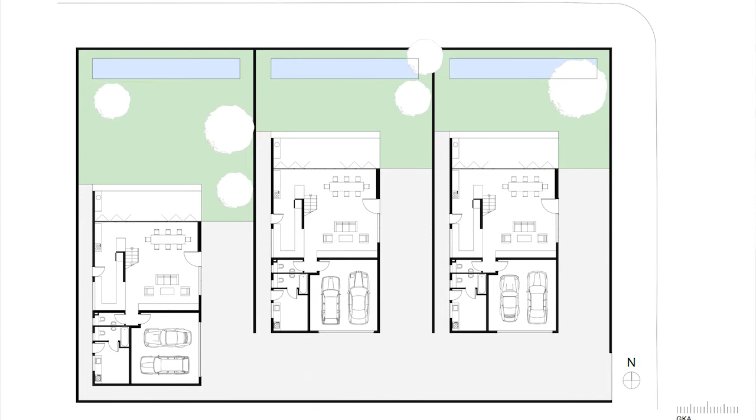As you can see, they're made almost entirely out of concrete, and we had a very experienced specialist concrete contractor on the job. Together we optimized the scale and the size and the design and the construction sequence of these 3 identical boxes so that we could get the maximum reuse of the formwork. This efficiency of scale meant that we could afford to buy brand new shutters for the job instead of hiring them, and that was the biggest factor in achieving this very smooth, close to perfect concrete finish.

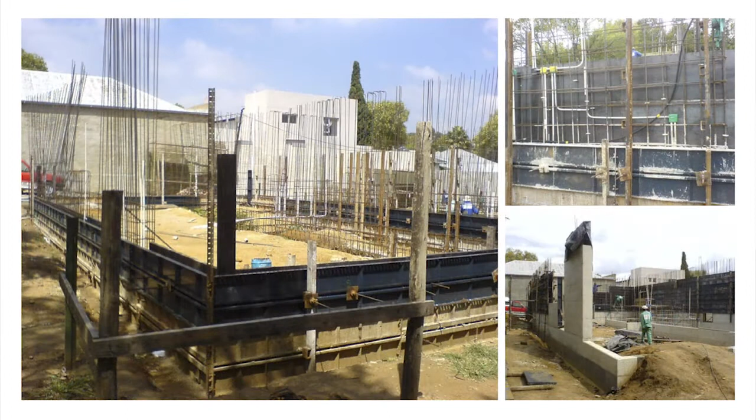There was no chasing of services into the walls. All the services, all the conduits, all the draw boxes had to be precisely pre-planned and shown on elevational drawings so that they could be positioned in the walls before the pour. So we had to be quite thorough.

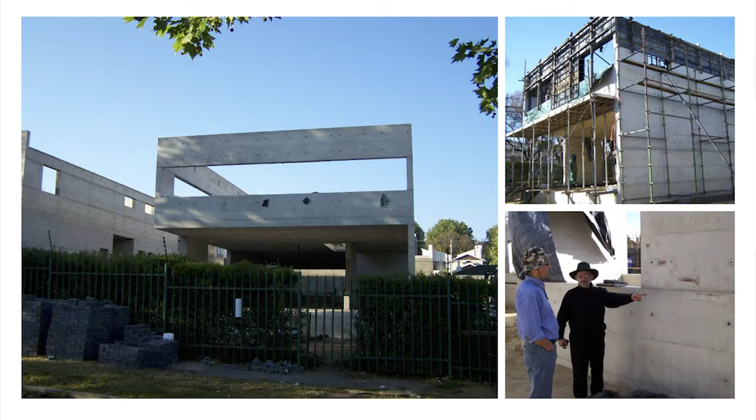I lived in this house for 10 years, and I loved that house. We had all 3 of our children there. But it's also a big reckoning living in a place that you've designed. You're confronted by your blind spots almost every day.

So that was a big learning. And another learning on the project was that having an open-minded client and a really professional builder on a job goes a long way to ensuring the success of a project.

I call this one Inhabit the Boundary Wall. It's a house on a subdivided tennis court. It's one of a series of houses that we did at the time where we were very interested in pushing the building to the very edges of the site.

This meant that we could eliminate the inefficiency of having a separate boundary wall. And the Joburg Town Planning Scheme actually makes provision for this. It's surprising to me that this is not a more pervasive typology, given our penchant for boundary walls in this town.

So the angular parallelogram-shaped garage has to do with parking cars at 45 degrees, but it also has to do with the overall defensive strategy of the house, in that the garage is wider on the x-axis and shorter on the y-axis, so it forms a kind of buffer zone across the site.

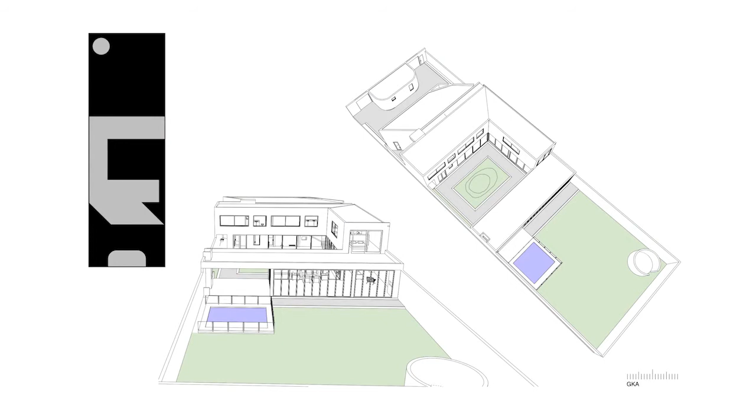There's an in and an out. It's a coachman's driveway with a cottage on the street, so that cottage then comes to replace that boundary wall on the street. And being shorter on the y-axis frees up space for a series of courtyards along the length of this property. I think that the figure ground diagram is quite beautiful here. It really illustrates the planning strategy quite well.

We used polished black pigmented terrazzo concrete flooring, and the stairs are made of salvaged shutters from the site, which we profile cut and then sandwiched together to make one big block. That wall is breeze block, which we plastered and then cut very carefully so that it forms a kind of perforated surface. This project I call Shifting Goalposts.

In early 2010, we were commissioned to design a clubhouse for the five-a-side soccer courts at the Wanderers Club. It was a high-profile project for a high-profile sponsor, and it had to be ready to open in June in time for the World Cup. This gave us roughly 2 months to design it, do all the procurement, get all the approvals, and then roughly a 4-month construction window. So it was very tight.

The building is a simple double-volume rectangle on a raised terraforce plinth. We ran several planning scenarios, and we found that the quickest way to build was not actually using all ready-made construction technology, but to create a kind of composite structure of in situ cast concrete columns, steel beams, echo slabs, and then glazed infill.

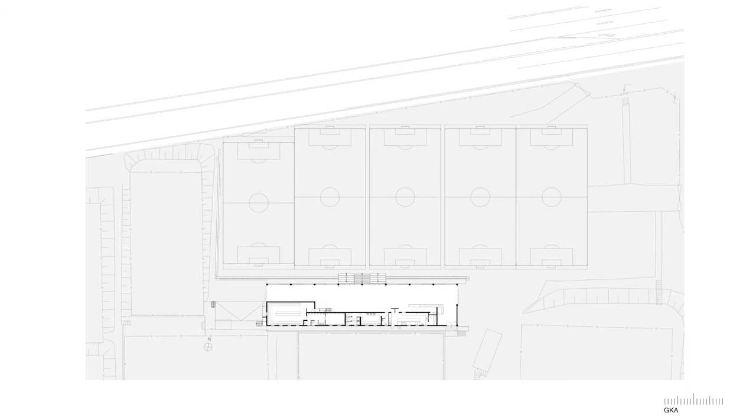It's quite simply planned. There's services running along the south, and then a nice viewing area which overlooks the soccer courts. So this building is all about seeing out. It's highly transparent. All those doors are operable, and there's a band of glazed windows along the upper story of the mezzanine level all along the southern side.

So the building is set up for optimal conditions for passive natural ventilation when all the doors are open and the windows are open. But what happens when your client refuses to open the doors for security reasons? It's quite nice in the winter when the season's cold, but in the summer it gets pretty hot. And the lesson here was that it's quite difficult to predict how your client's going to use their building.

We were so focused on getting this thing finished on time and on budget, which we did manage to do, but we never had this one very important conversation. This project I call future-proofing.

Here we were approached by a young couple who were just starting out, and they wanted us to build their first home. And the brief was to design a one-bedroom home which they could then add to over time as their space requirements grew when they had kids.

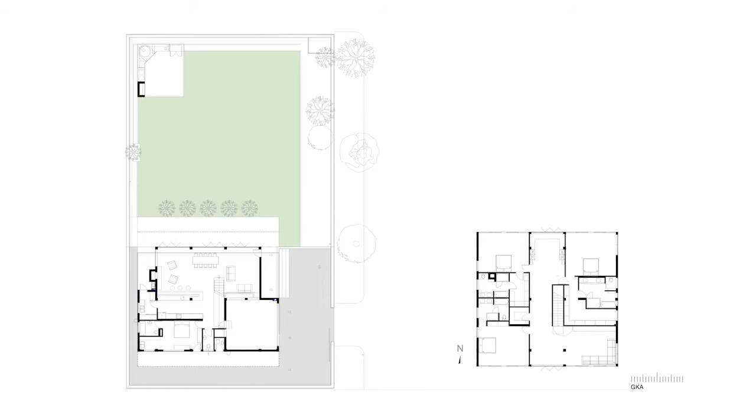And we proposed that they put up a concrete frame, and then we'd finish off the ground floor, and over time they could then populate the upper story, fill it in, and move up there. So the planning's really simple. Quite challenging engineering cantilevers here. It's cantilevering in 2 directions. There's the frame going up.

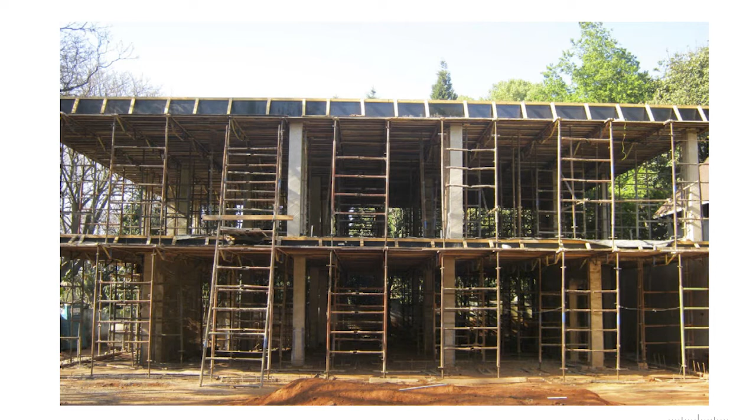The client's an electrical engineer, so he was kind of obsessed with the conduits and making sure there was enough conduits. It also speaks quite nicely to this idea of future-proofing.

So this project I call Love Thy Neighbor. If we flash back to that infographic I showed you towards the beginning, around 2013, 2014, you'd see a big gap. That's when the global economic recession hit our practice pretty hard, and once again I was hustling for work. So I was looking for development opportunities and pitching this to investors. One of them resulted in this project, a small housing development of 9 terrace houses, clusters, on long, narrow stands, each with their own courtyard and a large garden. Each pair of units shares an entranceway.

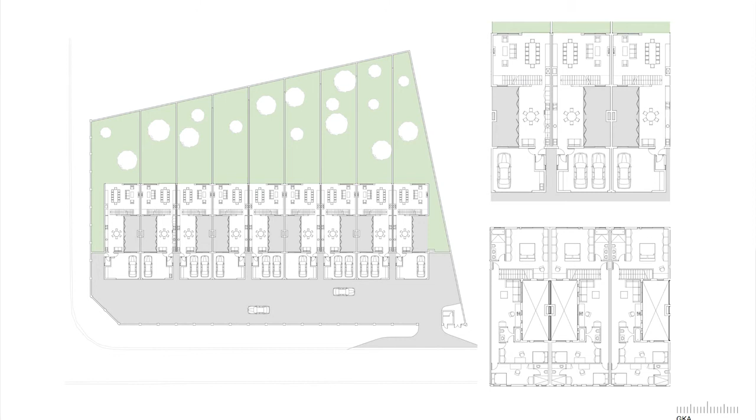We were quite excited by the compositional potential of this long street-facing elevation. Apart from providing architectural services for this job, the investor insisted that I throw all the fees into the pot as well as my life savings, and in exchange I'd be made an equal partner in the deal. This seemed like a really attractive deal at the time.

I'd never really appreciated the effect that delays have on a project's profitability, and now with skin in the game, as they say, I understood why developers seem to have this extreme impatience on projects.

This is what a unicorn looks like. It's called a Regulation 38 certificate. Those of you who have ever tried to subdivide a property will know what I'm talking about. The town planning process here was like something out of a Kafka novel. Neighbors objected. People in key positions at council were either permanently on leave, absent, or deliberately obstructive. My balls were in a vice for 3 years.

As an architect, we were able to maintain this healthy distance from the financial pressures and day-to-day management of our projects, but this was different. Just last week, I got a call from one of the buyers to say that their fridge had packed up - it's like 2 years after they'd moved in - and could I help them?

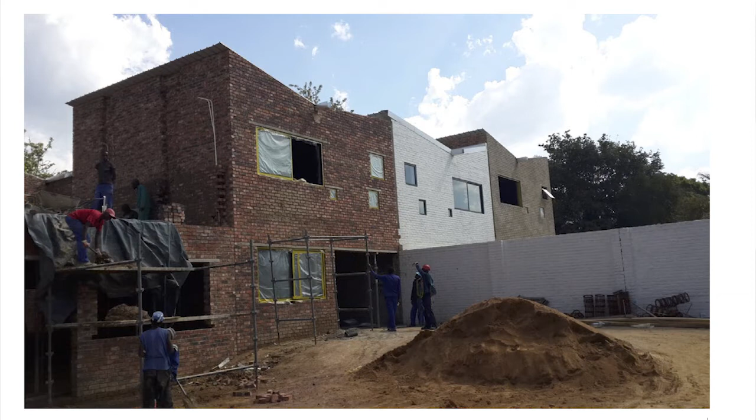Another learning from this project is to always build up the slope, and if you want to know what I mean, then come and ask me after the lecture.

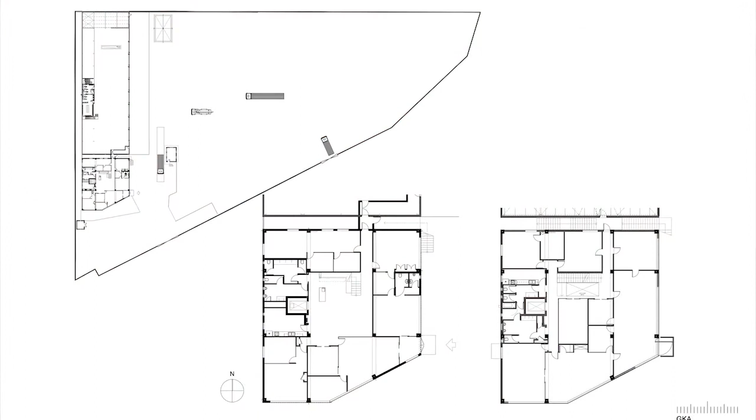I call this project Broad Brushstrokes. This was a new corporate headquarters for a metals recycling business. It's a family-owned and run business, and the purse strings are tightly controlled. During our briefing, the clients were deeply suspicious of architects, who they thought were out to waste their hard-earned cash on unnecessary decorative flourishes. Our challenge was to deliver a building that was dead simple and yet had a clear, strong identity. The site's an extremely dusty scrapyard, so face brick was an obvious choice for its low maintenance, robust quality, and it's applied in a taut, reveal-less skin so that it's easy to hose down.

We were very interested in the expressive potential of patterning the brick by using various colors of brick, and we did several studies. Ultimately we settled on this one because the more intricate patterns tended to push up labor costs, and the client only agreed to go this route if we could prove to him that it didn't cost any more than a uniform face brick box.

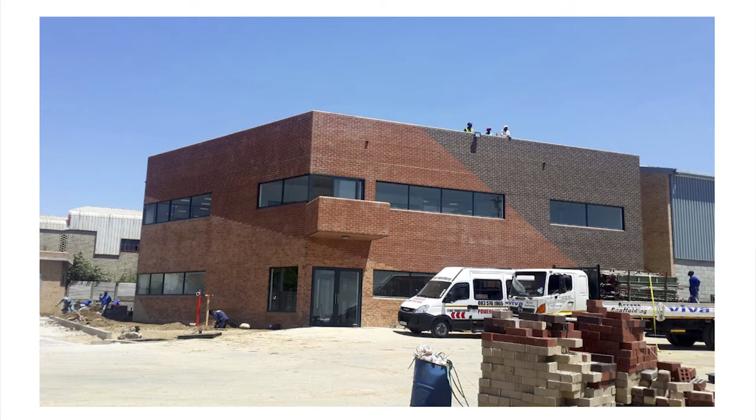We were very fortunate to have a broad north-facing site, so we could accommodate all the classrooms on a single level, all with equal access to sunlight and to the playground. The upper story houses therapy rooms and other auxiliary functions.

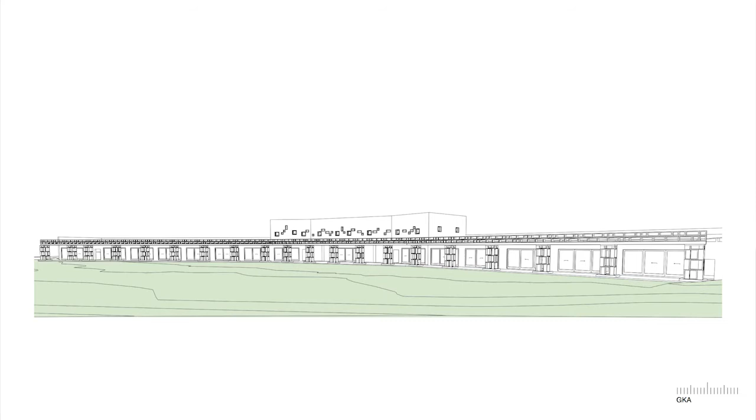A feature of this project was the exhaustive use of these off-the-shelf precast concrete frames, and we exploited the wide variety of shapes and sizes available - there's something like 40 different variations. We varied their position relative to the ground plane, obviously for playful effect, but more importantly, this has to do with the variation in eye line between an adult and a child. We also used the frames to create these chunky, porous columns along the north-facing colonnade.

Each column has a completely different configuration of frames and colored inserts, so that each column is completely unique, and the kids really love them - they climb on them and through them. As you walk down the passage, the colored panes of glass align and combine in different ways, so it's kind of like this interactive lesson in color combination.

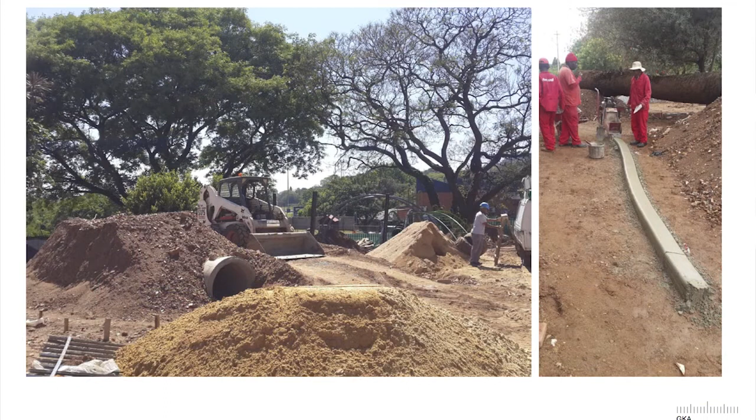We stockpiled all the rubble from the building we needed to demolish on the site, and we crushed it and used it to make these mounds, creating a kind of Teletubby-esque landscape in the playground. That's a really good way of making curbing there on the right.

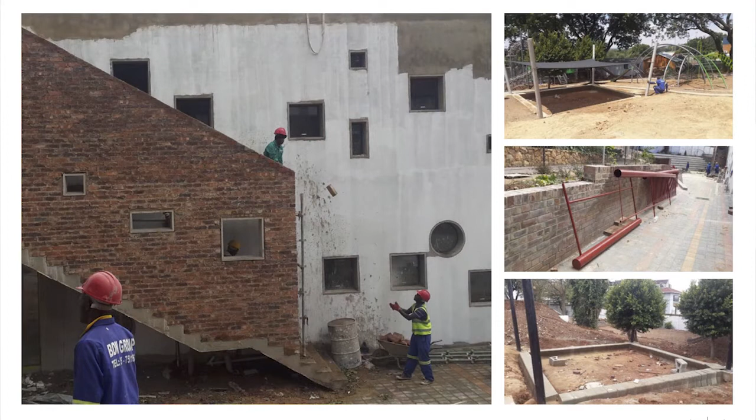It's an extrusion process, shown here on the top right of the sandpit. We developed this sandpit cover that could be lowered at night to protect the sand and raised up during the day to provide some shade.

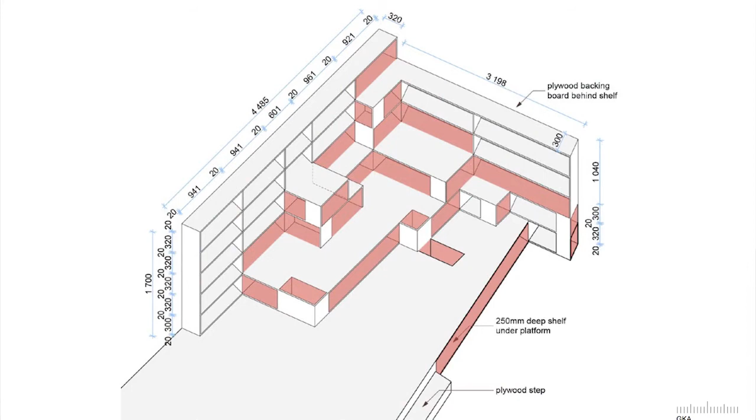We were quite into making everything quite chunky. The library was conceived as a kind of rocky terrain that kids would climb on and explore, looking around for books and finding them in all sorts of unusual places, even in the floor.

The house has a concrete frame with coffered slabs, and the infill are clay brick specials. This is quite an interesting story - I was walking around the Corobrik yard, and we came across this

This is why I tell the students to get out from behind their computers. You never know what you might find out there.

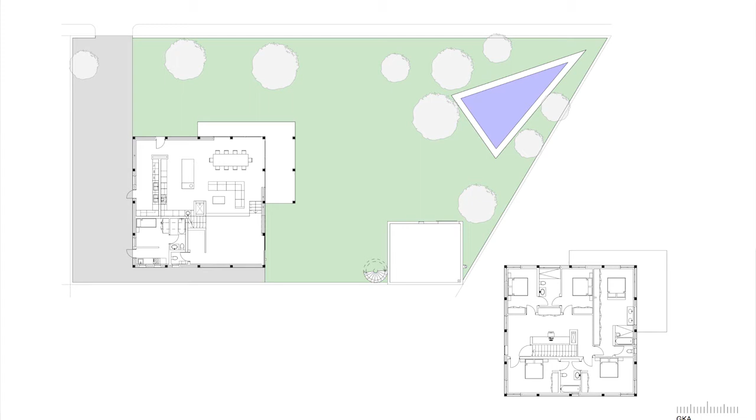It's a very simple plan, all centered around a fireplace, with a sort of split-level playroom, and upstairs are all the bedrooms. There's a triangular pool - you can see it's half out the ground and half in the ground.

We used an imported plywood for the kitchen, and the floors are a blue vinyl on a sort of chevron angle, at a diagonal. That's the raised playroom.

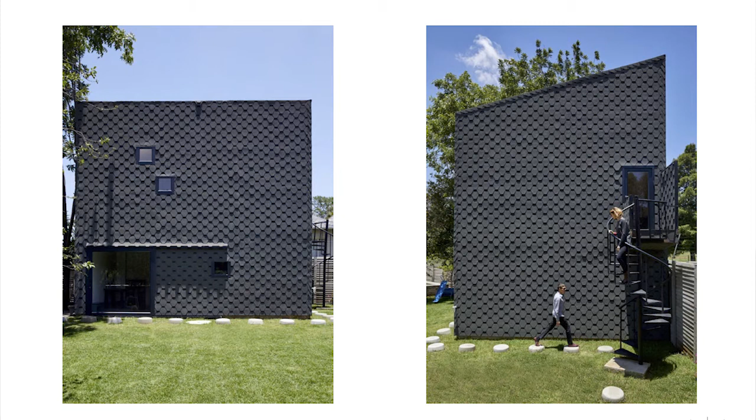That's the studio. It's a light steel structure with a rubber shingle cladding, which is normally used to cover roofs, but we applied it here on the walls.

I really love this product, it's very, very versatile. Because it's flexible, it takes up all those complicated details at the eaves, and there you see the studio going up.

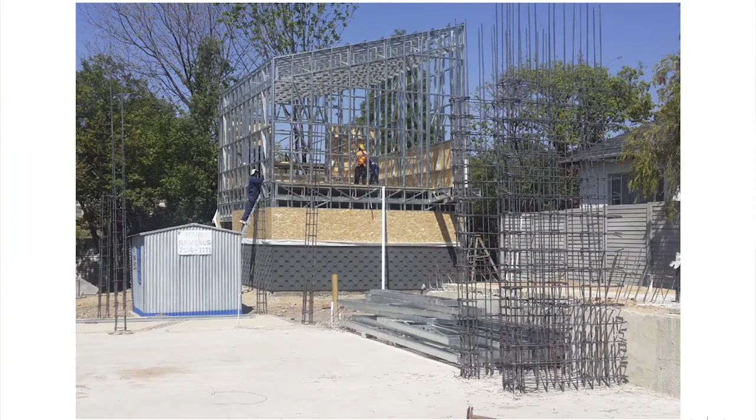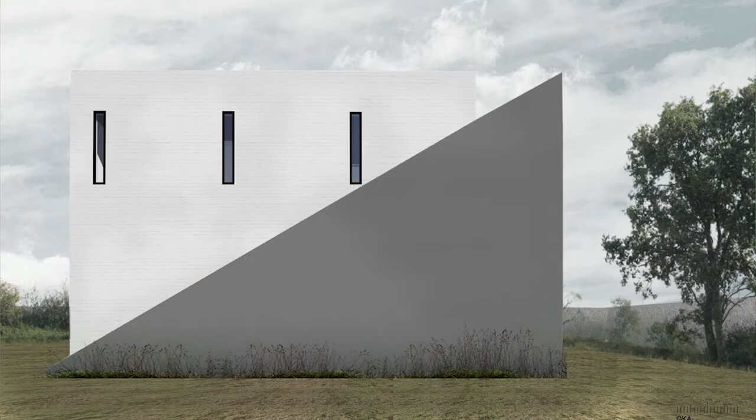Now for some of the work we're currently busy with in the office, just a small sampling. This is our shape sorter house, and you enter behind this giant triangle.

There are several Roman arches at different scales and heights. There's a diamond-shaped void and a corresponding skylight. The footprint is exactly 10 by 10, so I think Jonah Arrow would approve, for those of you who attended his talk.

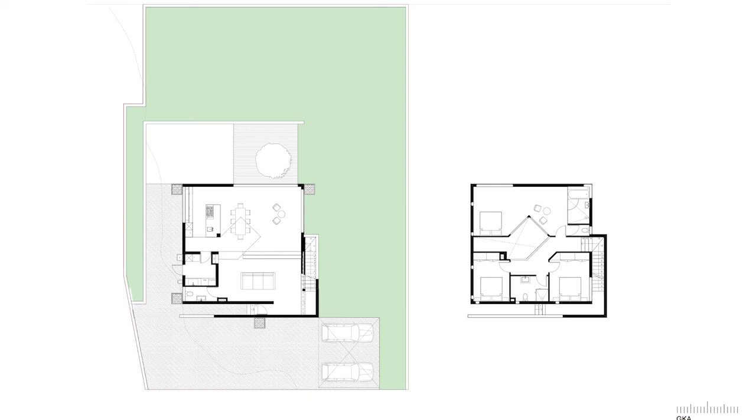We're building it out of clay pavers, and they have a great scale - much narrower than normal bricks, only 50 millimeters. They have these nibs on them which are used to space them, so we're facing those outwards to get this interesting texture.

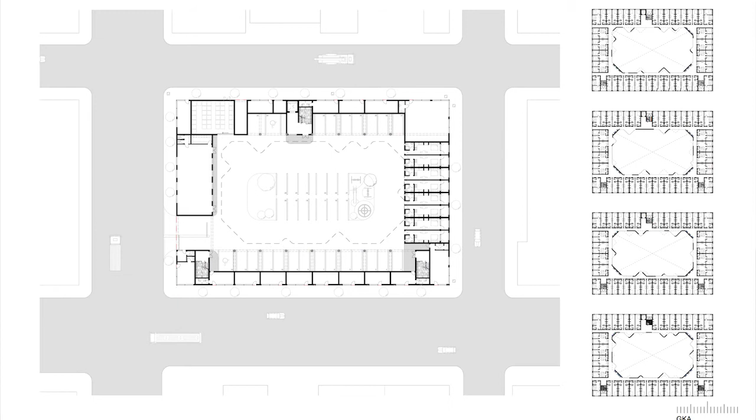There's a series of wash troughs on every story, and these become communal laundry areas, in an attempt to really activate that space. We're building in wash lines, and we're quite excited about the potential of all this colorful laundry and the wavy slab edges, making a kind of giant art installation out of this courtyard.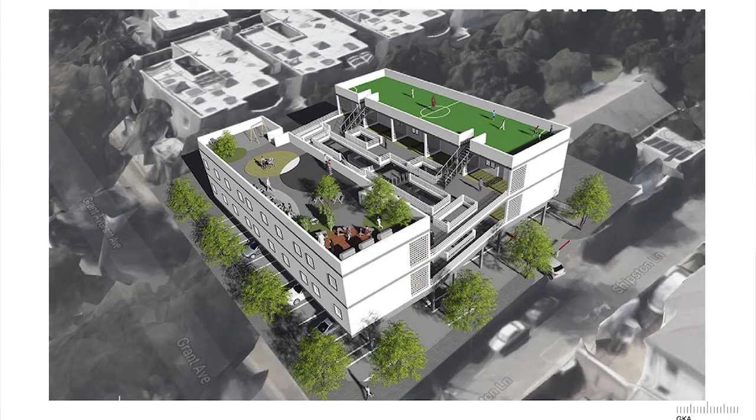This is in a similar way here, but on a bit of a smaller scale and for a bit more upmarket clientele. This is a high-density scheme, and we're interested once again in having these very broad public communal areas that double up as the circulation for the building. We've sort of repeated the ground floor on every level here.

Here's the plan - the figure ground's quite interesting, I think. We have a number of projects along the Louis Botha BRT route, and it's been really incredible to see the powerful effect that legislation of increased densities has had on the market.

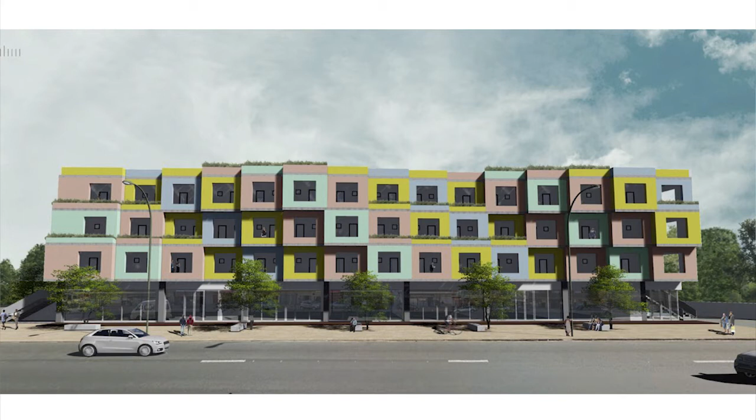It's really opened up a lot of opportunities for developers and consequently for us.

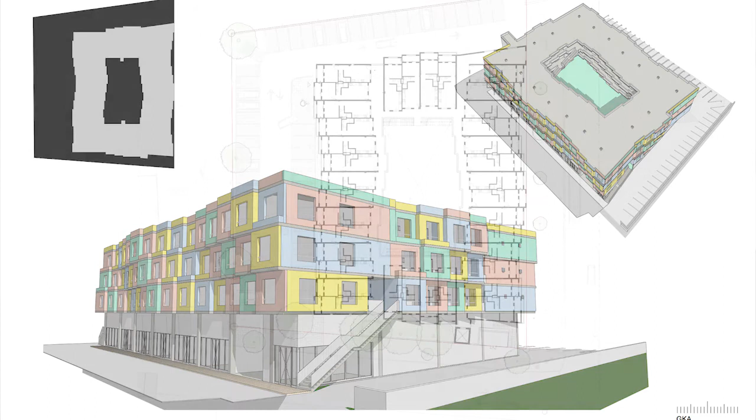This project is on the old Dollhouse site. The density here is about 300 dwelling units per hectare, so there's about 120 of these units. They're quite small, they're one-bedroom units, about 17 square meters each.

We've really enjoyed the kind of pixelated scale of this project because the units are so small. You can have quite a bit of fun with modulating the facade, but that modulation then carries through to the interior courtyard, and it's not these straight runs of passageways. Everything has a kind of vibrancy to it because of the jagged edges. Quite a mission to line up all the plumbing through ducts with a building like that.

Now I want to talk a bit about the GSA. I've been teaching here for 2 years now. I teach a unit loosely titled Methods and Materials, where we focus on research. The focus of our research is on how we make our buildings. We're looking for new ways, and we use physical models and then we test them. Deciding to teach, and being part of this faculty, has been such a highlight for me.

This is one student who was very interested in thatching and actually spent a few months in the field getting his hands dirty. Then we did some tests with thatch, and some of them were quite counterintuitive, but had very interesting results. We took a small sample of thatch, bound it together, and applied some vertical loads to it. It turned out that thatch is actually quite strong when bound like this - it came back results of like 14 MPa, which is like 3 times stronger than the average brick.

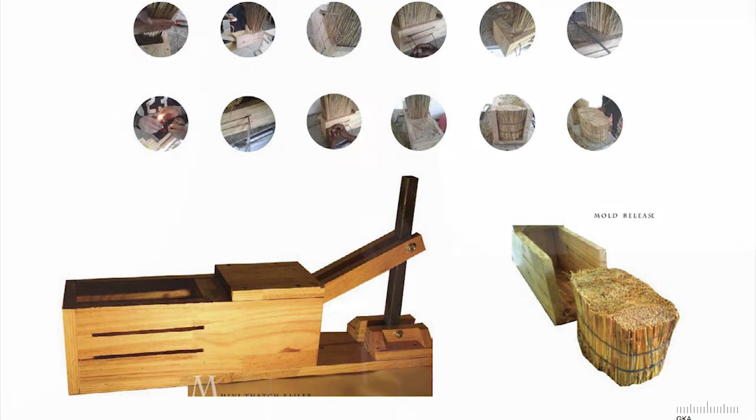It has something to do with the fact that thatch grows in various thicknesses - they are small and thick pieces, and when you bundle them together, they act in a kind of aggregate fashion, similar to concrete. The small pieces fit in between the larger ones, and then we try to make blocks out of the thatch and developed a kind of baler for it.

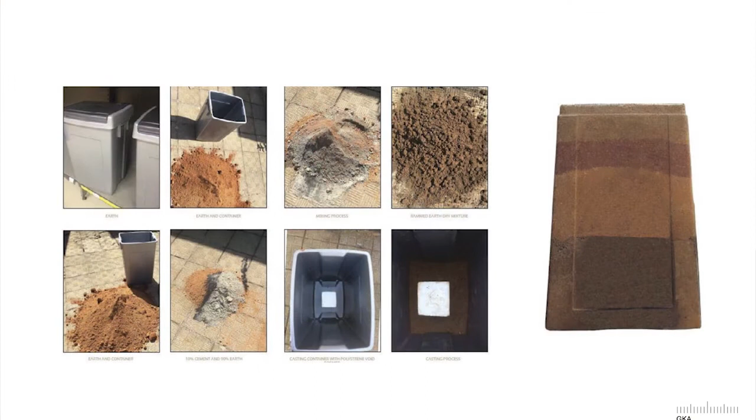This student was looking at a very ancient building technique, rammed earth, but quite interested in updating it and molding it in disposable bins - these plastic Addis bins - and coming up with an architecture for that.

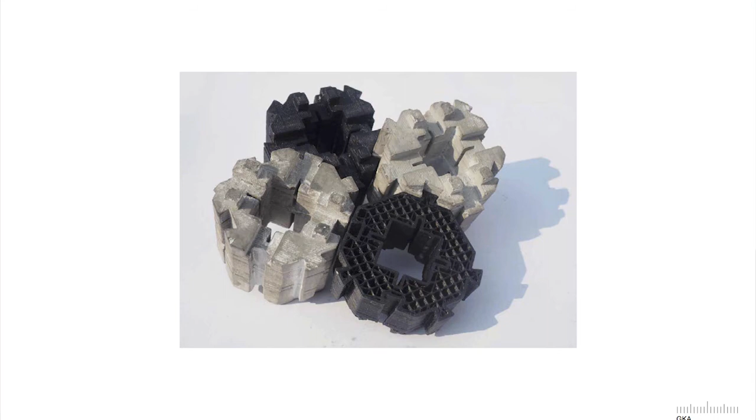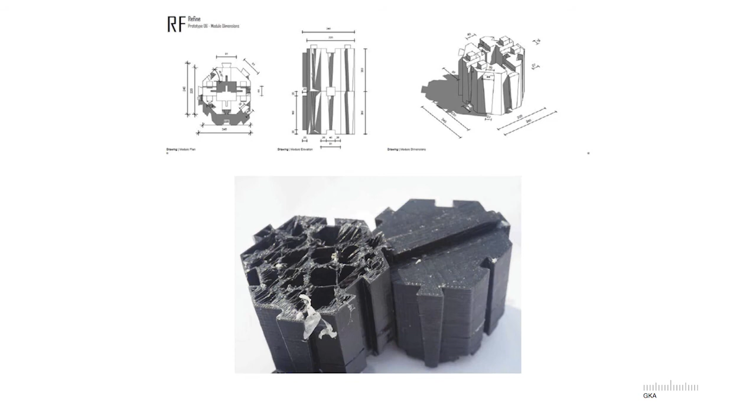Another student wanted to reinvent the way that we make our buildings so that we could demolish them more efficiently. He invented a block that had a dovetail joint and then could slide together or be taken apart quite easily. This is an injection molded product using similar technology to the way that bottle crates are made, and similar proportions to that as well.

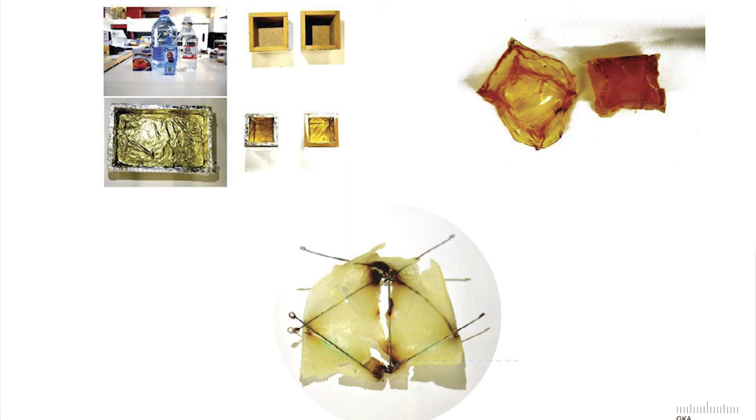A student looking at bioplastics - these are really interesting materials. She was making them on her kitchen stove at home. They have really interesting properties, and they're completely biodegradable.

The student was looking at trying to fashion a new building cladding out of recycled milk cartons that he bisected and then laminated together in a low-temperature oven to make a very realistic, viable product, I thought.

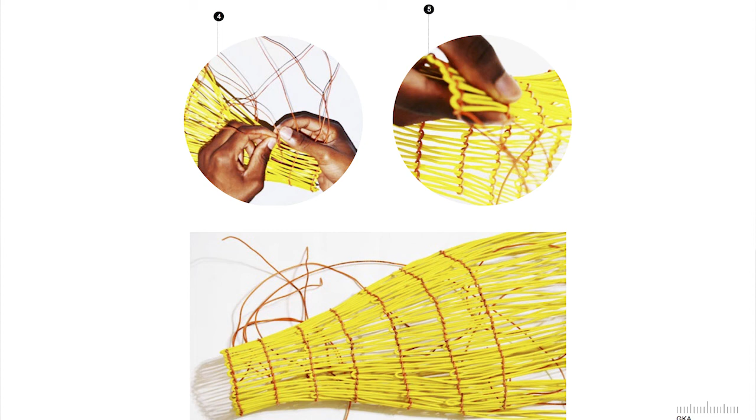Here the student was looking at quite old methods of weaving - vernacular weaving, African weaves - and then a one-to-one scale upscaling of that research, where he's weaving now flexible electrical conduit and then filling it with reinforced concrete. Also quite viable, I felt.

It's been a bit challenging balancing family and running a practice and pursuing these academic interests, but the benefits are commensurate. As far as I know, there's no other institution on the continent which runs the unit system where part-time staff are accommodated and nurtured, and this affords an exciting crossover between the field and the academy.

We are afforded this scope for brave, abstract experimental thinking and robust intellectual debate that is very different to the kind of thinking that one does running a practice. Being surrounded by colleagues of the intellectual caliber that we have here - the conversations, the ideas, the feedback, the critical thinking - it keeps you sharp.